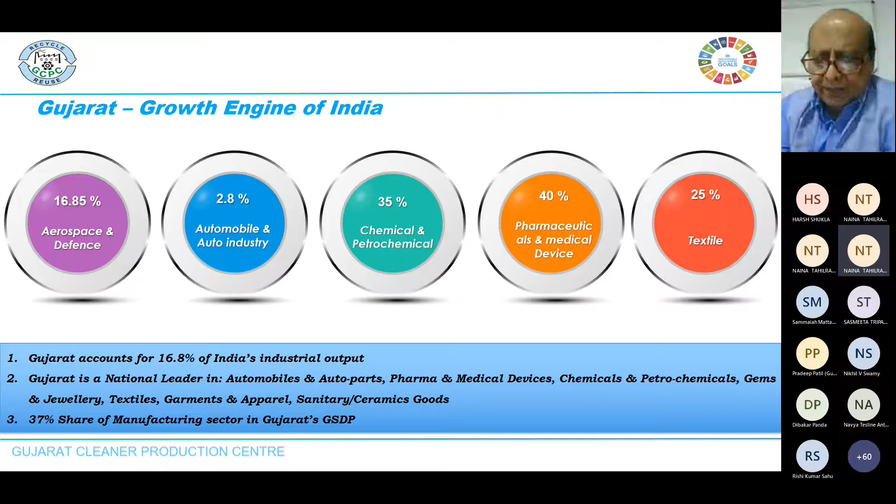As you know, I come from the industrial development department, and we need industries. We have been developing industries. And if you talk of the growth of Gujarat, we are now leading in aerospace and defense, then automobile. But the important sectors for us are chemical, petrochemical, pharma, and textile. So that is almost, put together, almost 50% of these national products being manufactured in Gujarat.

And if you look across the geographical area of Gujarat, we have spread all over, covering all areas of Gujarat, having different sectors like engineering, chemical, textile, mineral based, agro, plastic, paper, and others. So this is the scenario.

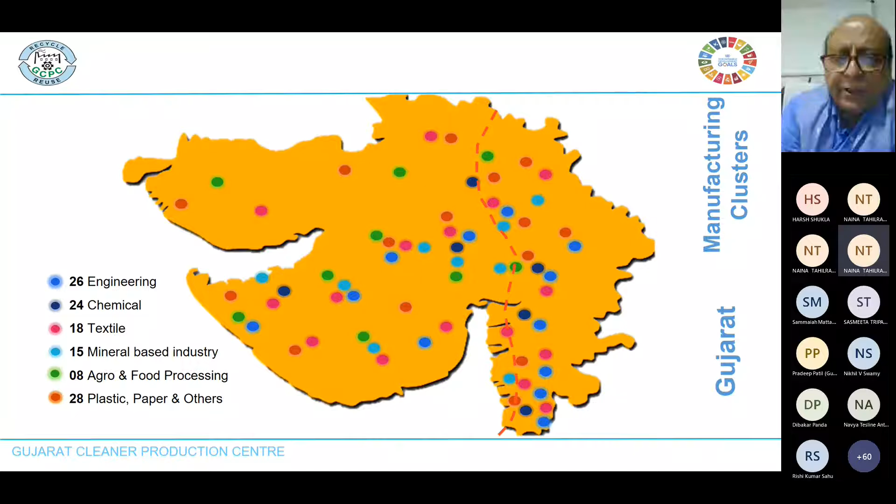And for the smooth development of industries, GIDC, that is Gujarat Industrial Development Corporation, was established in the year 1962 for the smooth development of industries. The very purpose of GIDC is to acquire suitable land for industrial development, then provide needed infrastructure like roads, water supply, electricity, even underground drainage, treatment facilities, and invite industries to come.

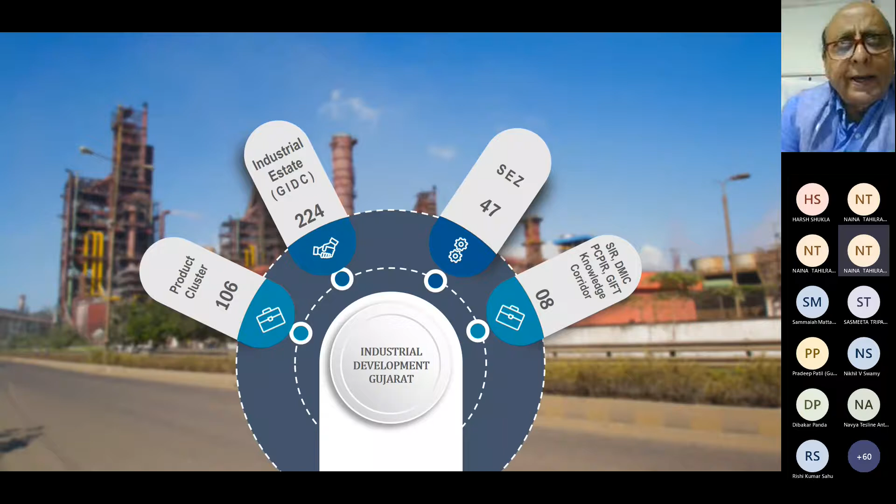And so far, as on date, we have got more than 220 industrial estates across Gujarat. Then we also have 100 plus product clusters. We talk of special economic zones and also special investment regions.

As you know, friends, there is the Delhi Mumbai Industrial Corridor, we call it DMIC, and the high impact industrial area within 150 kilometers on both sides of this dedicated freight corridor has an investment potential of almost $90 billion. And if you look at the length of that DMIC, it's almost 1500 kilometers, out of which almost 560 kilometers passes through Gujarat.

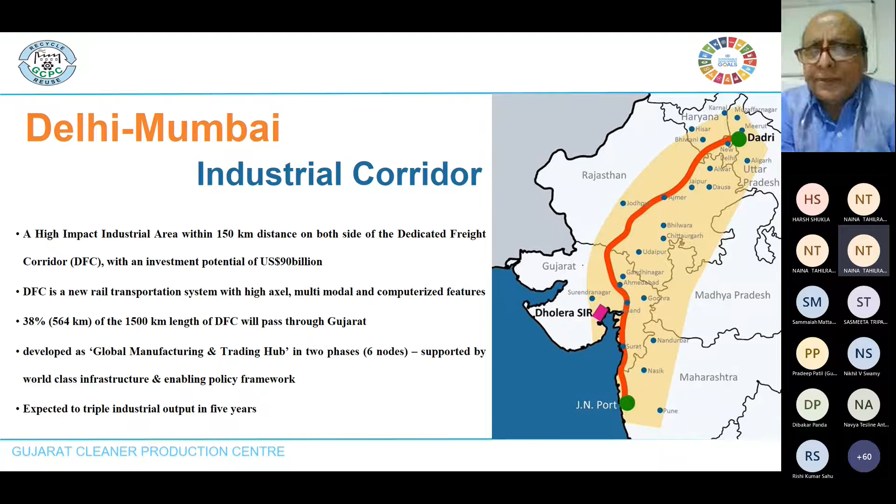And we are developing a very important special investment region across both sides of this DMIC. The most important is Dholera Special Investment Region, which we are developing in 900 plus square kilometers, having all facilities like innovation center, industries, logistics, knowledge, IT related industries, commercial, residential, entertainment, all that.

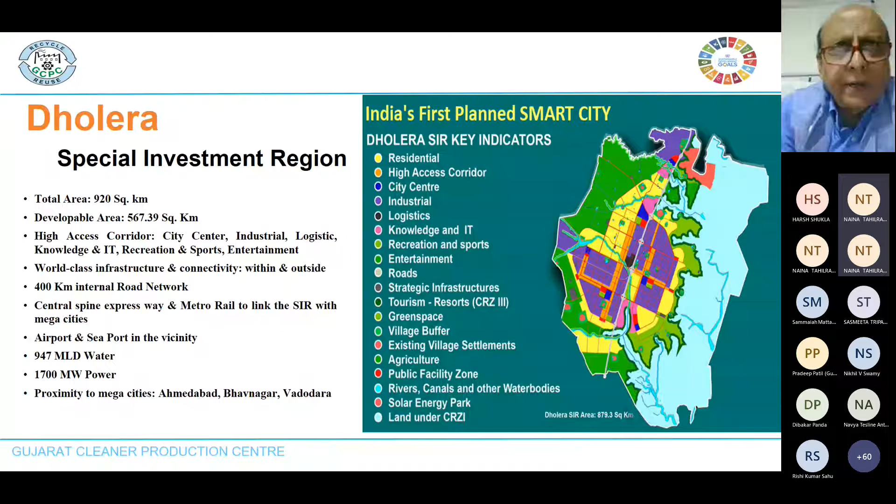So that is what we will be putting with the provision of 900 plus MLD water supply, and also the latest sewage treatment plant, so that we can recycle each drop of treated wastewater, and also a common effluent treatment plant for treatment and recycling or reuse.

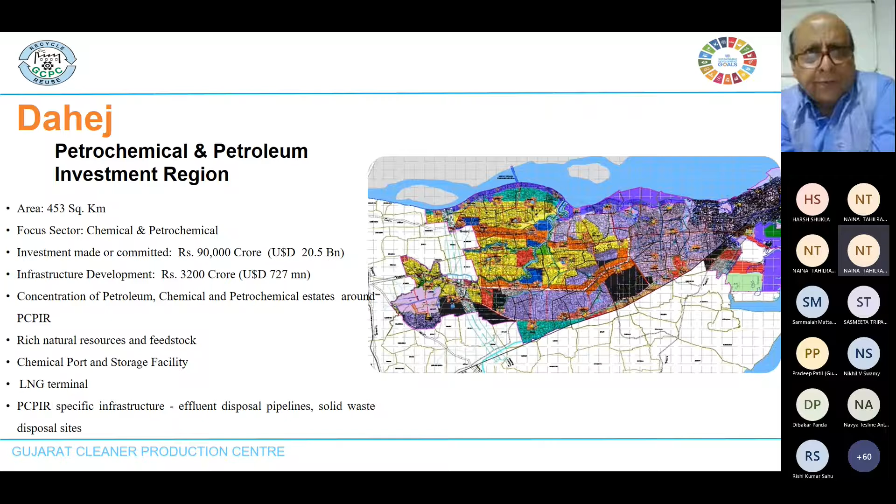Another important one, friends, is very near to our Bharuch Engineering College, around 50 kilometers from Bharuch - that is Dahej. We have a petrochemical and petroleum investment region, which we are developing in 450 square kilometers. The main focus sectors are chemical and petrochemical. Phase 1, 2, 3 are already being developed, and we are talking of further development. We have provided all needed infrastructure, including underground effluent pipeline, common effluent treatment facilities, and also disposal facilities for treated wastewater.

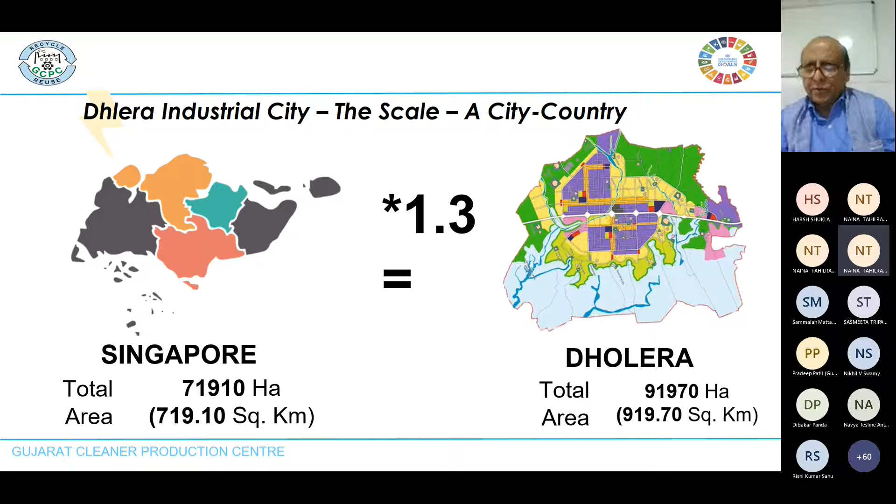This is just to give you an idea of how big Dholera would be. You know that Singapore has around 700 square kilometers of area, and we are developing 900 square kilometers in Dholera. What I'm trying to tell you is Dholera will be 1.3 times the size of Singapore itself. So you can imagine the type of development we have undertaken.

Back to our main thing, that is waste. So that is what we are considering. What is waste? And friends, you know that in cleaner production there is no waste.

It basically has certain resources, but we do not know the value of it. So that is very important. Whenever we talk of waste, it is not waste, but some resources which are misplaced. We do not know the value of it. Why is it arising? It is arising out of inefficient use of utilities.

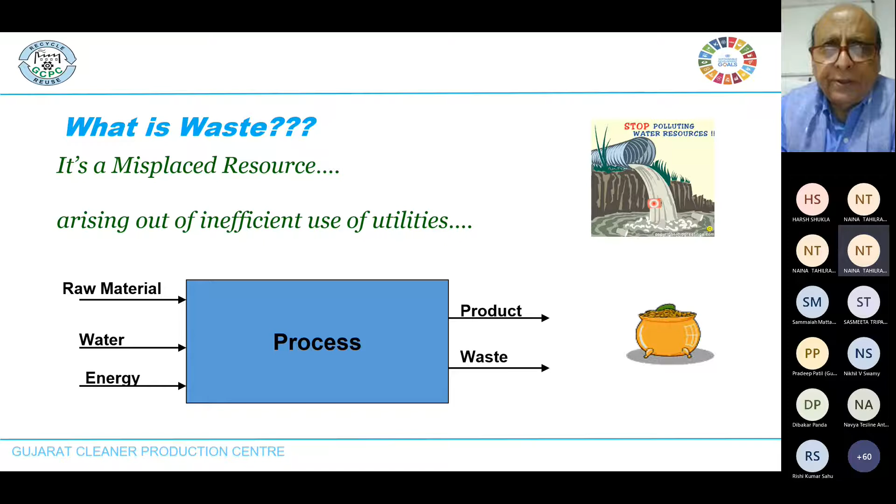Whatever process we have undertaken, whatever mole to mole reaction we talk of, the stoichiometry, or the role of catalyst and utilities, somewhere there is something which is not efficient, and therefore what we are getting along with the product is what we call waste, which could be byproduct, unreacted mass, or raw material, which has some resources. So in cleaner production, the basic definition of waste is that it is a misplaced resource.

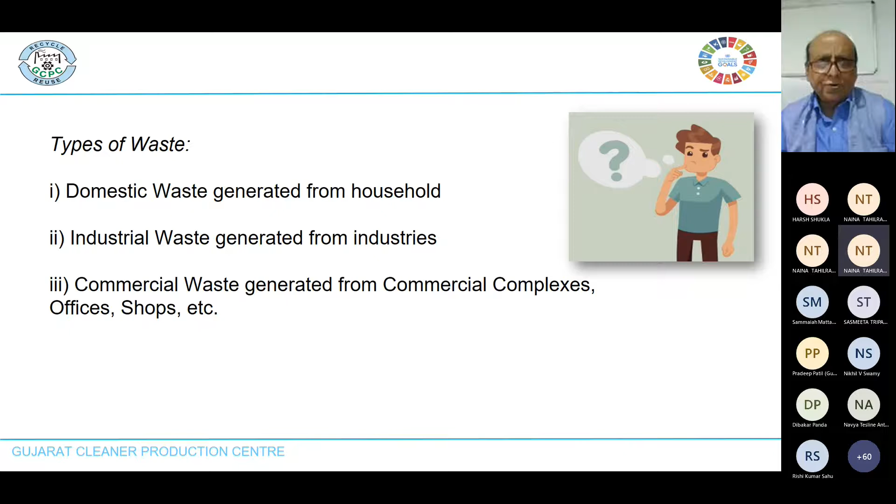Again, if we talk of different waste, it could be domestic waste which we generate from our household, industrial waste which is generated from industries, and another commercial waste which is from commercial complexes, offices, shops, shopping malls, theaters, and all that. So this is broadly how we are classifying it.

Domestic waste comprises garbage and rubbish which we throw in our dustbin, which could be bottles, cans, clothing, compost, or some food packaging, food scraps, newspaper, and whatnot.

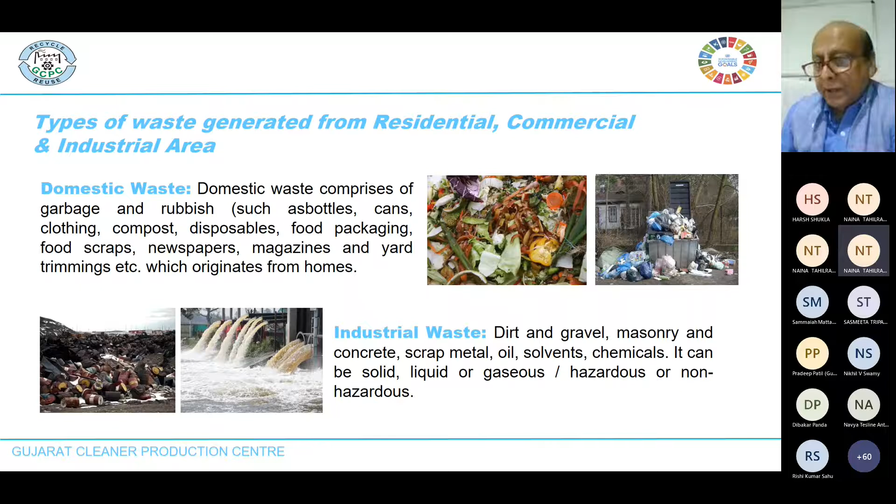So far as industrial waste is concerned, along with dirt and gravel, this is solid waste I'm talking about. We have building waste, masonry, concrete, scrap metals, oil, solvents, then going back to liquid, chemical, solid, liquid, and all hazardous waste which is from industries, and again back to commercial waste.

It is from different commercial complexes, offices, shops, restaurants, and all that, which could be biomedical waste if it is hospital waste, which is of course hazardous, along with some electrical waste or construction and demolition waste, and other food waste and everything. So that is what it is, by and large.

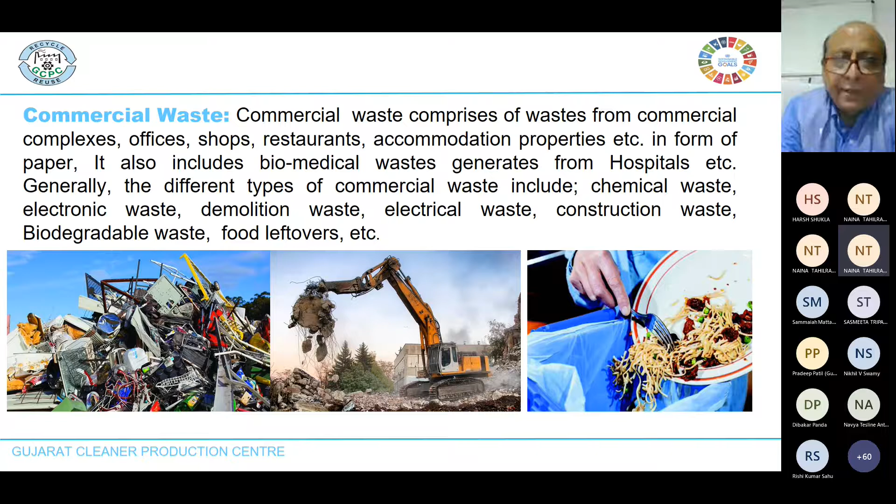So again, if we go for detailed classification, residential waste could be electronic, food, plastic, stationery, furniture. Commercial again, same thing - electronic, food, plastic. But then we have also got stationery waste, which is too much from our offices.

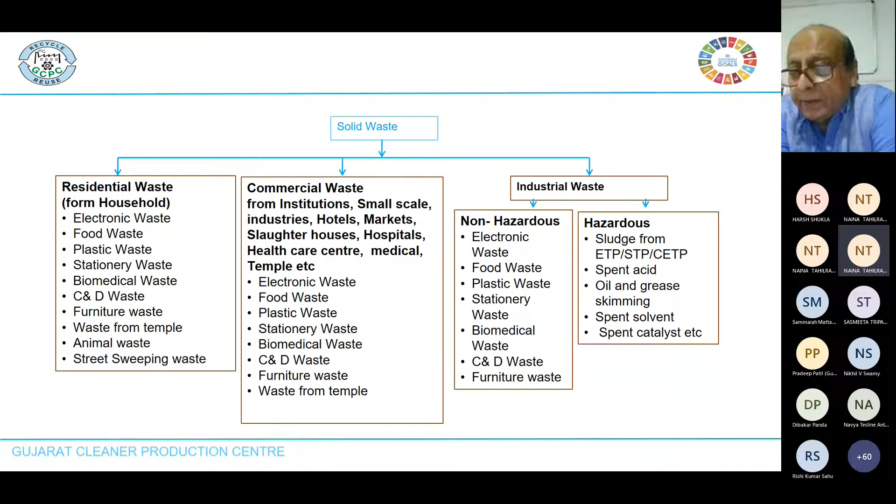And for industries, again we can classify non-hazardous and hazardous. The non-hazardous could be food, plastic, because we are now recycling it. Biomedical waste is, of course, hazardous, but now we have got facilities for it. But so far, hazardous waste from industries which we are dealing with concerns the sludge from effluent treatment plant or common effluent treatment plant. It could be spent acid, oil, grease, and solvents and catalyst and all that. So broadly, these are the classifications.

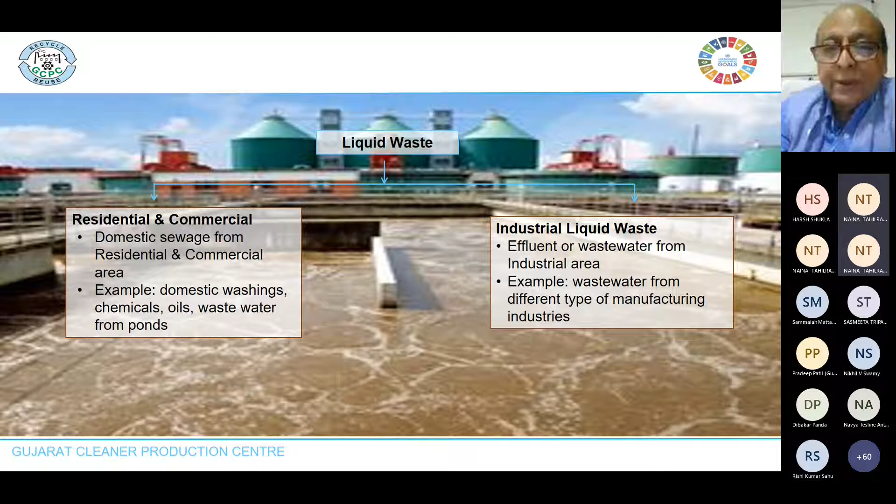Again, so far as liquid waste is concerned, talking of domestic waste, it is the wastewater from your toilets, what we call black water and grey water. And so far as industries are concerned, it is effluent from different reactors, from different units, which could be inorganic, organic, oil, water. But the main thing we are focusing on is hazardous waste, which is of course sludge from ETP, and again the same thing - spent acid, solvent, catalyst.

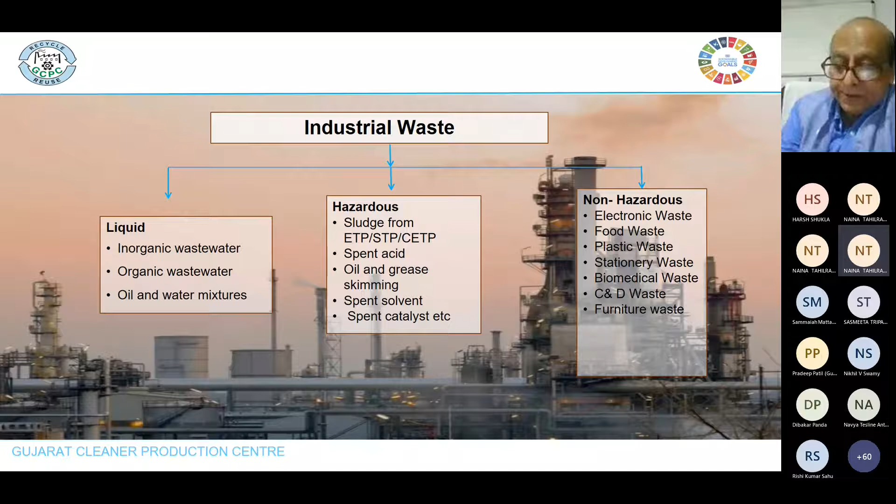And then we also have electronic, food, plastic, stationery, and biomedical waste. So these are broadly the classification of waste.

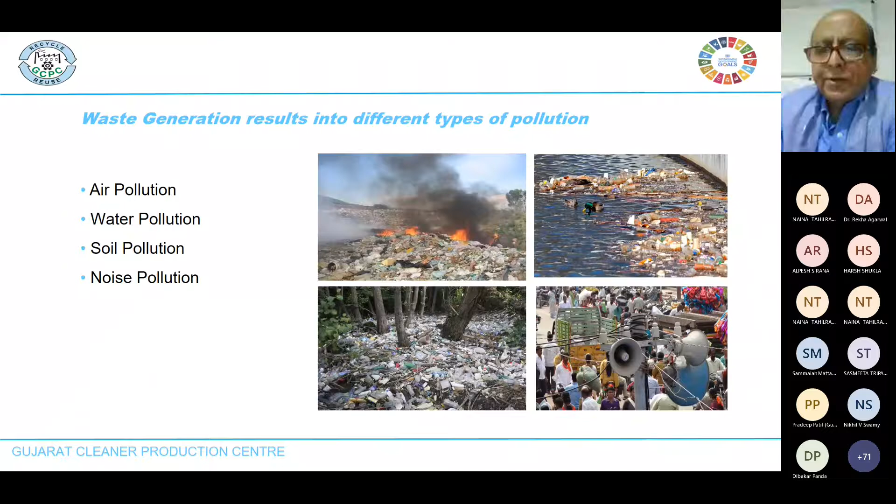Okay, so why should we be concerned about waste management? Because, as you know, improper management of waste creates issues of pollution problems - it could be air, water, soil, noise, and all that, which are creating very indecent conditions.

And taking this into account, it is good that there was a historical judgment - Special Civil Application 770 in the year 1995 - where the Honorable High Court ruled that industries located in and around Ahmedabad are generating waste which could be hazardous.

Because of this hazardous waste, there are issues of pollution. And because of pollution, there are issues of health and also affecting our crops. So, to be very honest and frankly, before that we were not aware.

Though there was a Water Act 1974, and Environment Protection Act 1986, we being an Industrial Development Agency never took it very seriously until this historical judgment was given in the year 1995. Then we realized that our industries, particularly the chemical industries, are generating something which is hazardous, and that is causing problems.

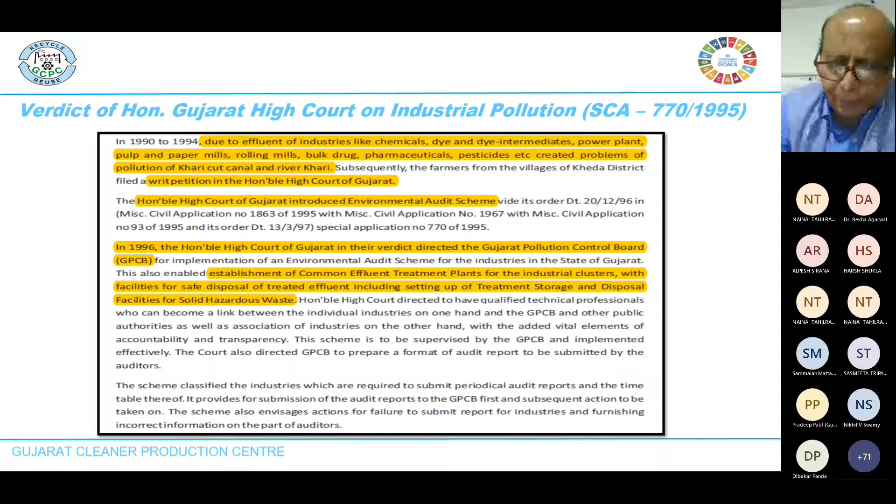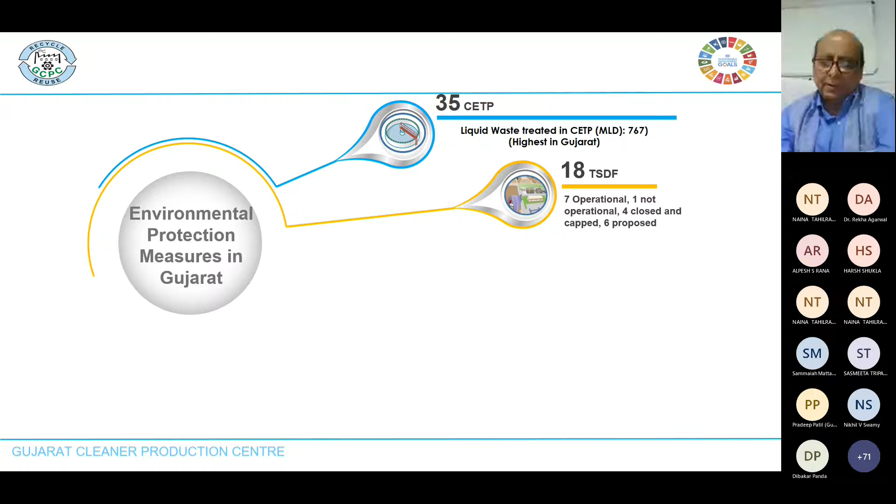That was the starting point, I believe, when we took it very seriously and started thinking about environmental protection measures through waste management. So initially, as you know, we went for the end-of-pipe concept, that is, you generate waste, take it to one point, and then treat it.

So the first idea for waste management through treatment came after 1995, 96, 97. We started thinking about the first common effluent treatment plant, because in industrial areas we mainly have small and medium entrepreneurs. For them, technically it was not feasible to have their own ETP, and financial viability was also not there. So the concept of common effluent treatment plant emerged after the 1995 judgment.

The first common effluent treatment plant was commissioned in the year 1997 at Vapi, with 55 MLD capacity. And it's good that we carried forward from there, and as of today we have common effluent treatment plant facilities at around 35 different industrial clusters.

We have created almost more than 750 MLD treatment capacity, and that, friends, is the highest capacity treatment facility which we have created. Not a single state in our country has so far reached this much, 750 MLD treatment capacity through common effluent treatment plants. At the same time, when we deal with liquid waste management through treatment facilities, we are also generating hazardous sludge, that is solid waste.

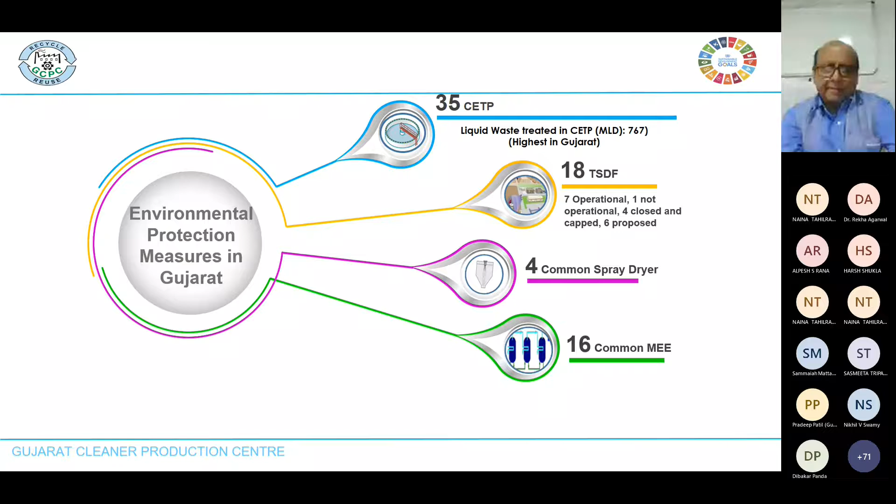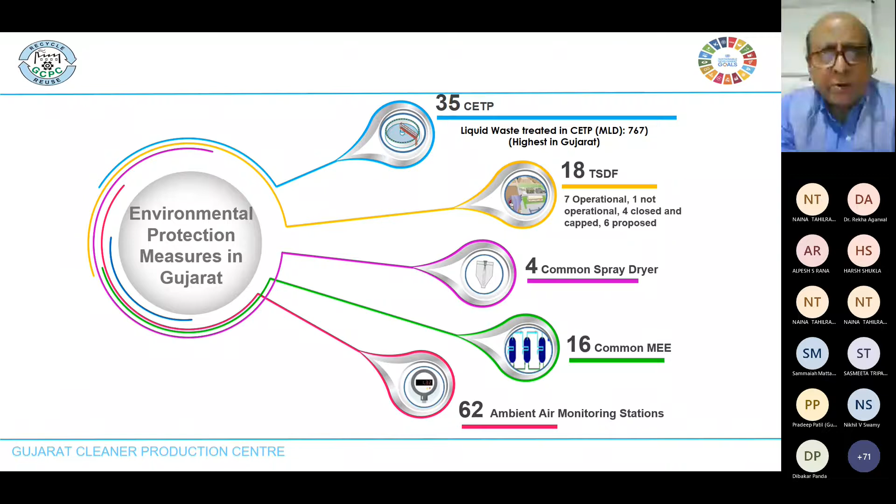Beyond that, we have also provided common spray dryers and common multi-effect evaporators at 16 places. We are conducting ambient air monitoring as part of waste management, and the wastewater after treatment is being disposed of at a safe disposal point.

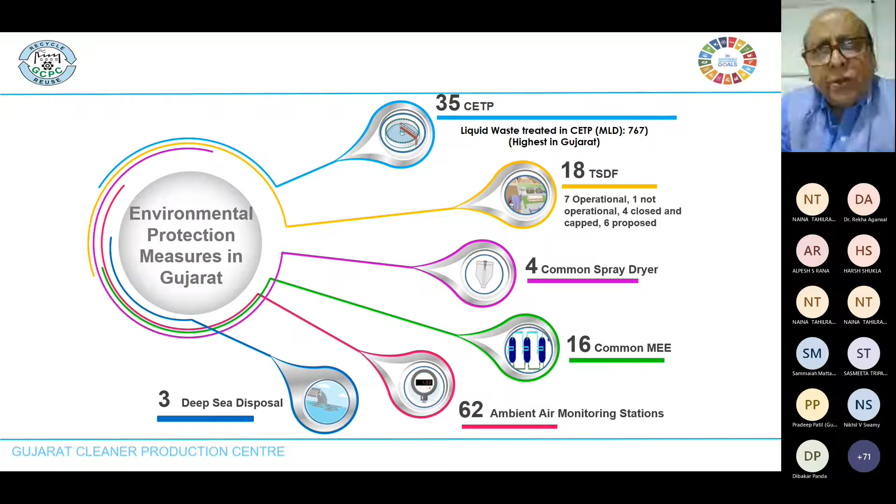For that, we have executed very expensive sea disposal pipelines in case of Ankleshwar, Panoli, Jhagadia, and Dahej, where we have provided deep sea discharge. So that is what I wanted to tell you about the waste management so far, the end-of-pipe concept which we have implemented, and we are running it successfully in Gujarat.

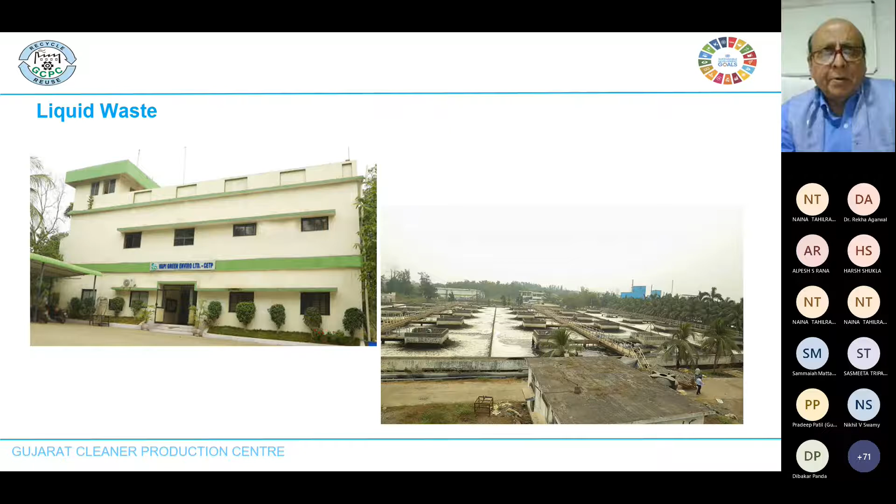These are some photographs of common effluent treatment plants, and every common effluent treatment plant has a very good environment laboratory where we can run different processes.

Initially we go for lime dosing because mainly we receive acidic effluent, and then we segregate right from the first point through highly concentrated streams. We take that to a common multi-effect evaporator and common MVR, then it is condensed, then to a spray dryer, and then we get this powder or salt, which is sent to the disposal facility.

On the other hand, the less concentrated effluent we take to the conventional treatment plant through screening, followed by grit chambers, equalization tank, flash mixer, primary clarifier, aeration tank, secondary clarifier, and final clarifier. Then we take sludge from the primary and secondary clarifiers to the sludge thickener, then decanter, and then to the sludge disposal site. So this is the conventional process.

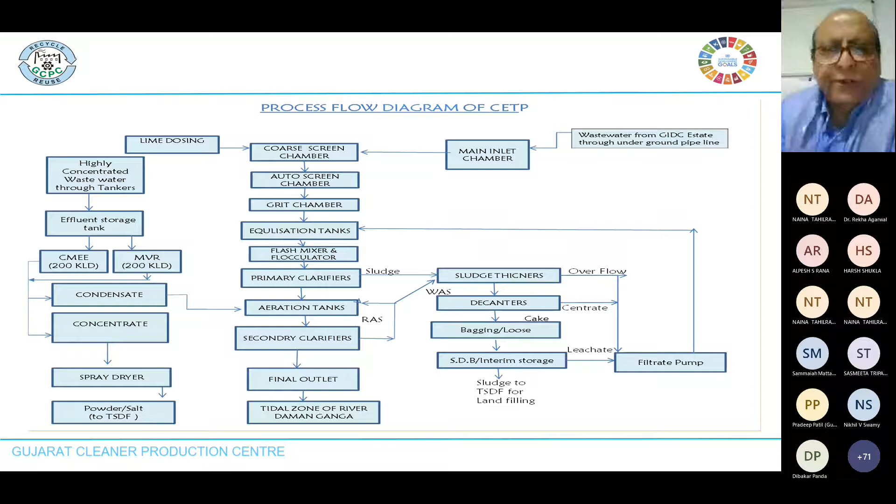And after treatment, for example at our Ankleshwar, Panoli, and Jhagadia sites, we have provided one common effluent treatment plant.

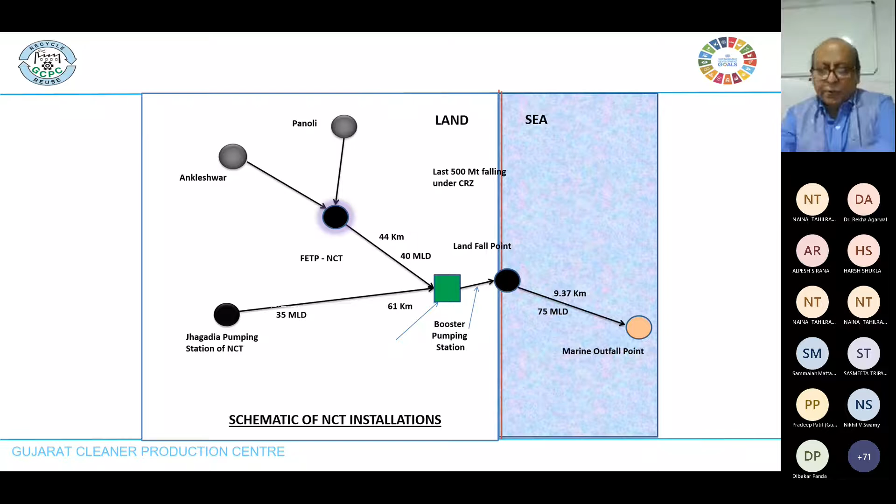We are receiving the partially treated waste from Panoli, Ankleshwar, Jhagadia at one point. We have a common effluent treatment plant facility of 40 MLD, which we are augmenting to 75. And again, we are disposing of that treated wastewater into the deep sea, almost a 10-kilometer pipeline into the sea. That facility we already created of 75 MLD, so you can imagine the type of work which we have put in. This is what in nutshell we are collecting and taking the disposal pipeline into the deep sea, and that is at Dahej, which is close to you, which we are under commissioning.

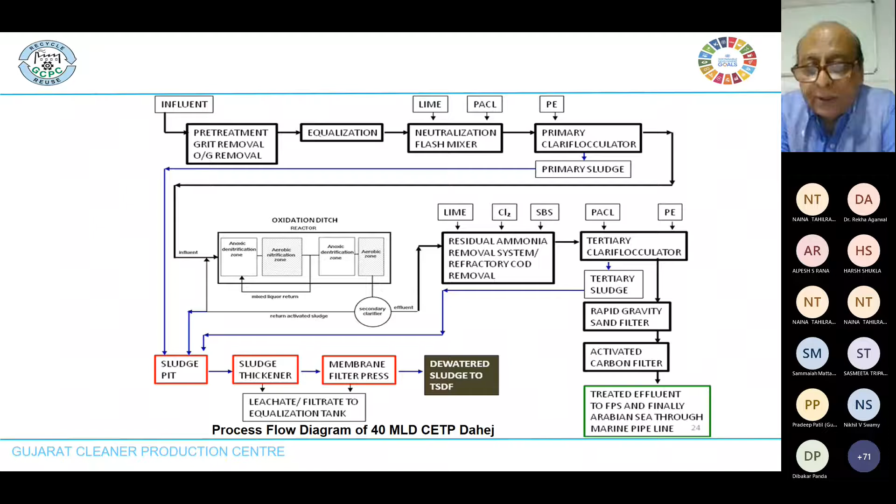Again, the same thing, same conventional process, where we have equalization grit, followed before that by neutralization, clarifier, and then we have secondary treatment plant. We have provided an oxidation ditch, and then from there we are taking it further because we are facing some ammonia issue, so removal of that system also we have provided, followed by the tertiary clarifier. We add polyelectrolyte, sludge is also being taken to thickener and filter press, and then after dewatering it is being sent to the TSDF.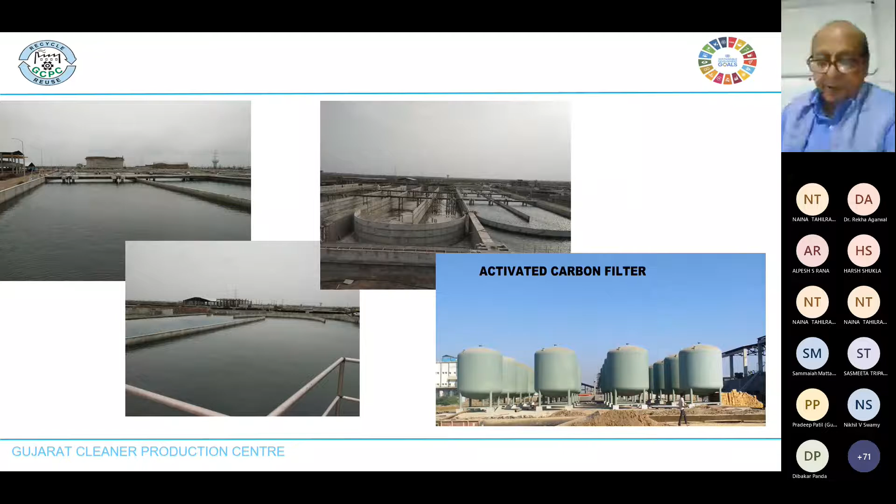This is what, some photographs of our Dahej CETP, which is already commissioned and running at 40 MLD.

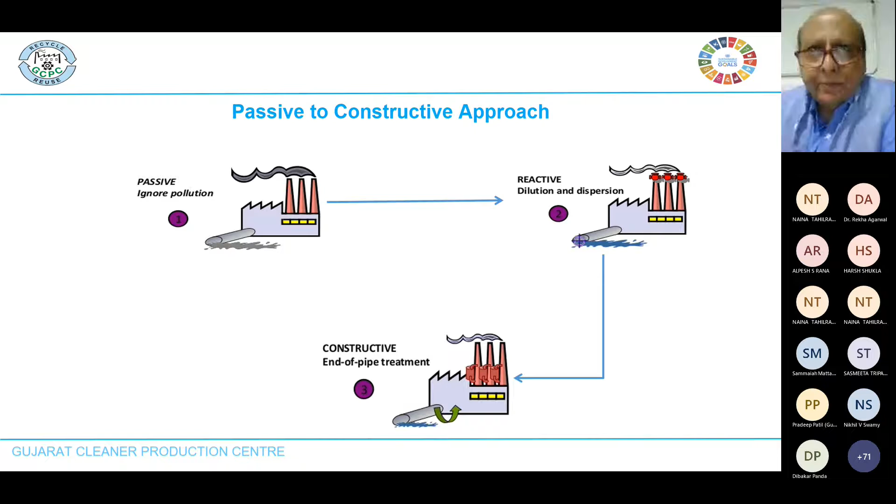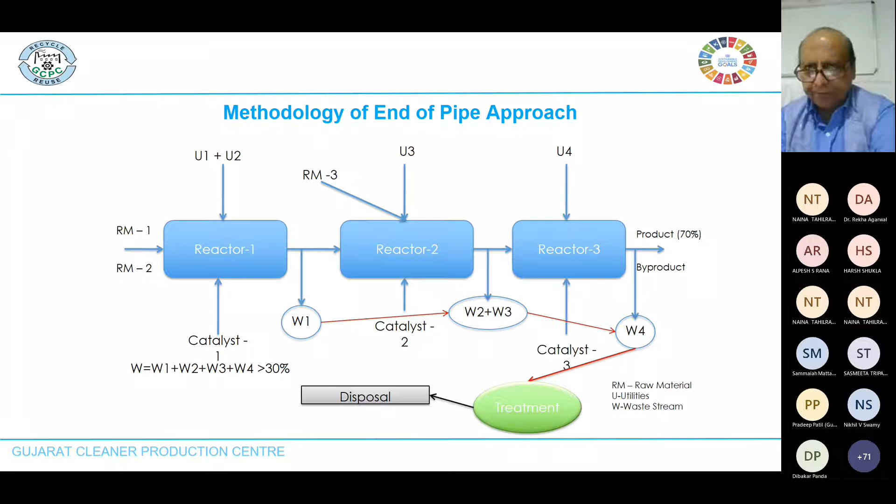So what I've been discussing about the overall waste management concept - earlier there was no management, just ignoring. Unfortunately, our parameters of pollution are concentration based, that is mg per liter, so dilution and dispersion was there. And then what I have discussed is the constructive approach, and that is end of pipe. So far we have provided so many facilities - this was the approach. The waste is being collected from different reactors, taken to one point, treated, and disposed. So that is the first concept of waste management, providing treatment facilities.

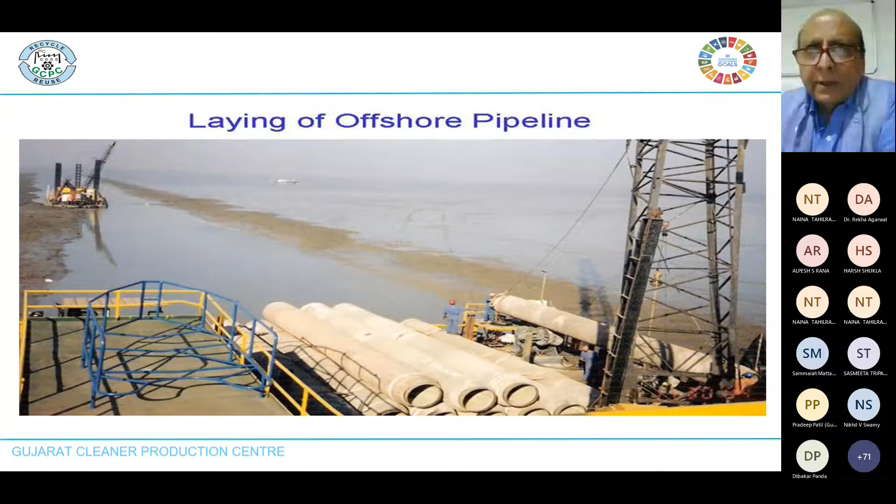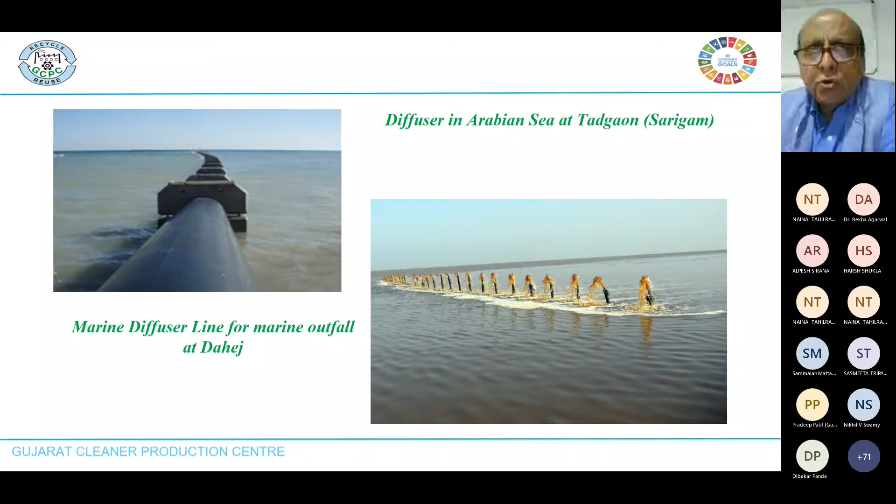And again, these are some pipelines which we have laid into the deep sea, marine diffuser arrangement. You can see the diffuser we have provided at Dahej, almost 4 kilometers into the deep sea, to achieve 150 times dilution.

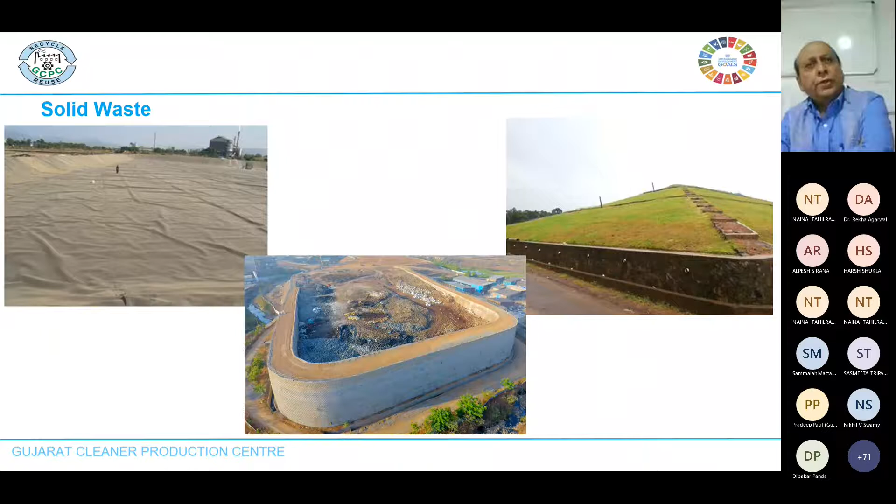These are very costly. If you talk of cost, the capital cost itself is more than 200 crores. And to run all these facilities of common effluent treatment plant, in most of the cases we are spending 1.5 to 2 crores. So you can see the type of money which we are spending.

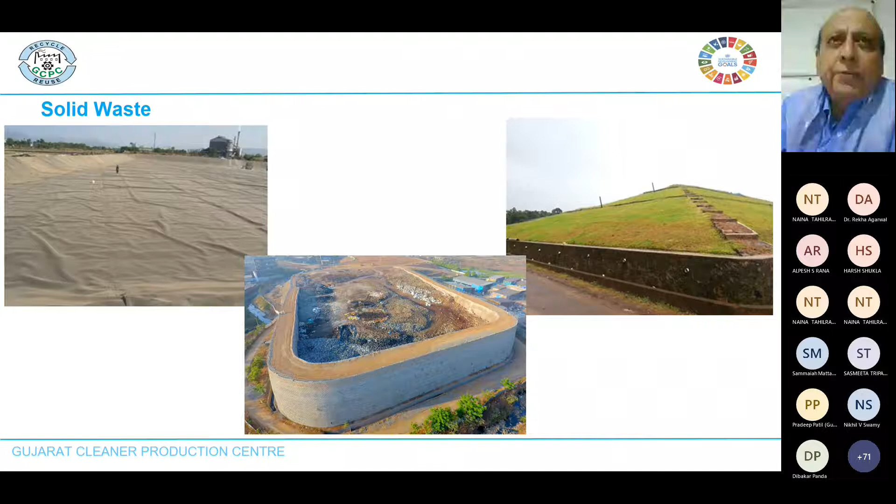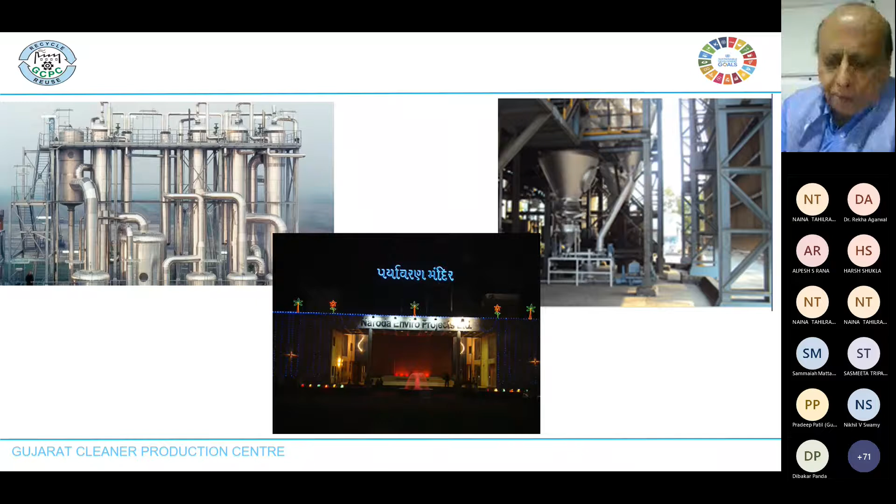So this was the concept. Earlier, economy and ecology were going in opposite directions, not reaching any point. Through end of pipe, what we have provided is a very sensitive balance, what we call a seesaw - economy on one side, ecology on the other. So if we lean more towards ecology, in terms of parameters and all that, then our economy is hampered. And if I talk of too much economy through industries, our ecology is hampered. So this is also not sustainable development.

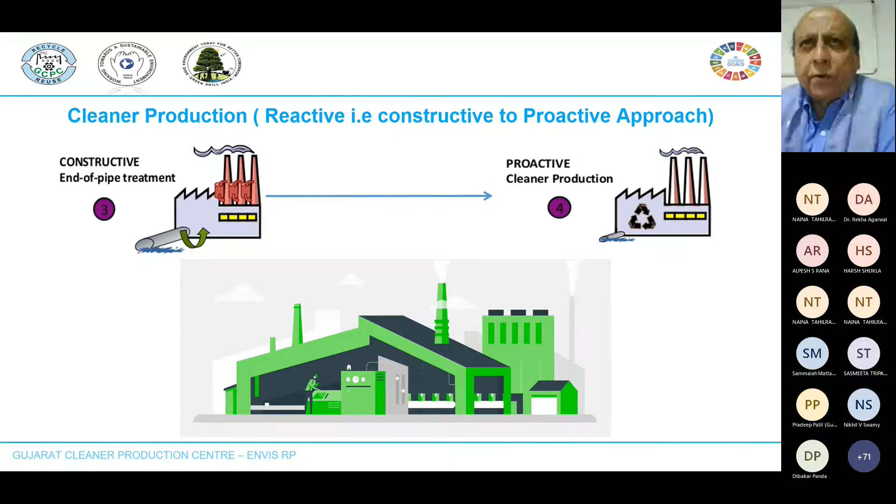But the tool which we are promoting is common effluent treatment plants - I mean this cleaner production, where we take economy and ecology together. Whenever there is an industry, we also first tell them how best they can reduce their waste right at the source itself. So this is the most sustainable concept, where economy and ecology work together, and that is what I call a proactive approach towards environmental management - cleaner production, moving from reactive to proactive. So right from the designing of your industries, you must think about the sources where you will be generating waste, and then think first how best you can reduce it. If not everything, then think of recycle, reuse, or recover. So these 3, 4, or 5 R's are very important: reduce, reuse, recycle, recover.

With this concept, long back in the year 1998, UNIDO, that is the United Nations Industrial Development Organization, approached us and requested for this highly industrial sector, Gujarat being one, on how best we can apply this cleaner production concept. So these are our activities.

Our main activities are orientation and awareness programs, followed by training programs. We provide training to students and to industry. And the very important thing which we have been doing is the demonstration project.

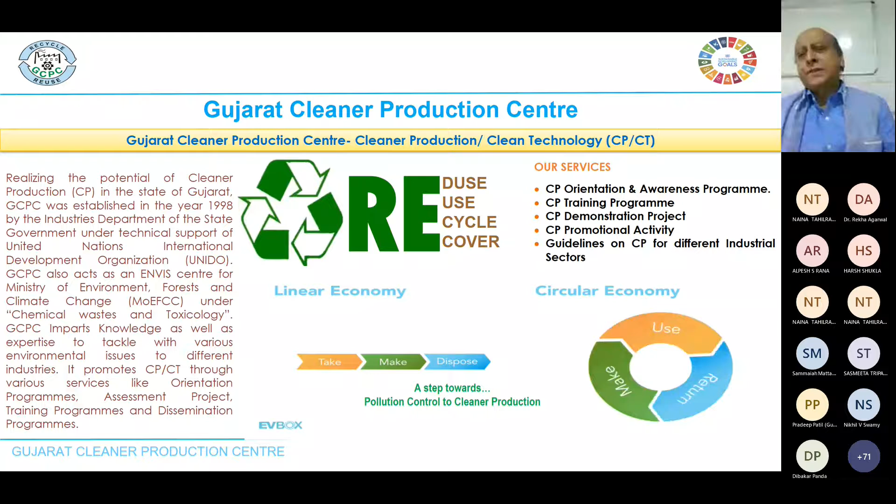We do what we call CP assessment in the willing industries, where we take up the task of generating cleaner production tools after studying their process. With a structured methodology, we derive a cleaner production assessment project which is implemented by the industries, and we also monitor the implementation.

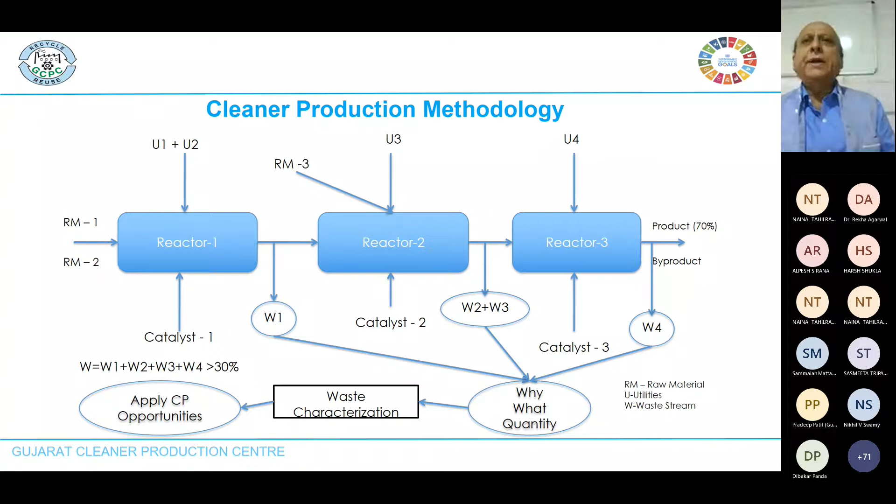The scenario change is that the waste stream, which earlier you were collecting and taking to one point, in cleaner production we now segregate. We look at the waste stream to see why it is there, when it is there, what it is, what it contains, the volume, the parameters, the characteristics. Then after that characterization, we apply our CP opportunities where we can minimize their waste.

In earlier end-of-pipe management, we simply collect and treat. Here, instead of collecting, we just study why it is there, when it is there, what it is.

UNIDO has a well-defined six-step methodology which we got started. The very first step is to have a CP team - qualified chemical engineers, environment engineers from our side, along with the industry side: the production manager, the process in-charge, and the people. Then we go for listing out the process steps, different steps with the flow diagram.

Once you do that, then we study where you are generating waste, and for that particular reactor we go for the material and energy balance, and assign cost to it and identify the causes.

After knowing the causes, we develop what we call CP opportunity. The best opportunity which is selected is again reviewed on how far it is technically feasible, financially viable, and of course environmental aspects - there should be improvement in environment.

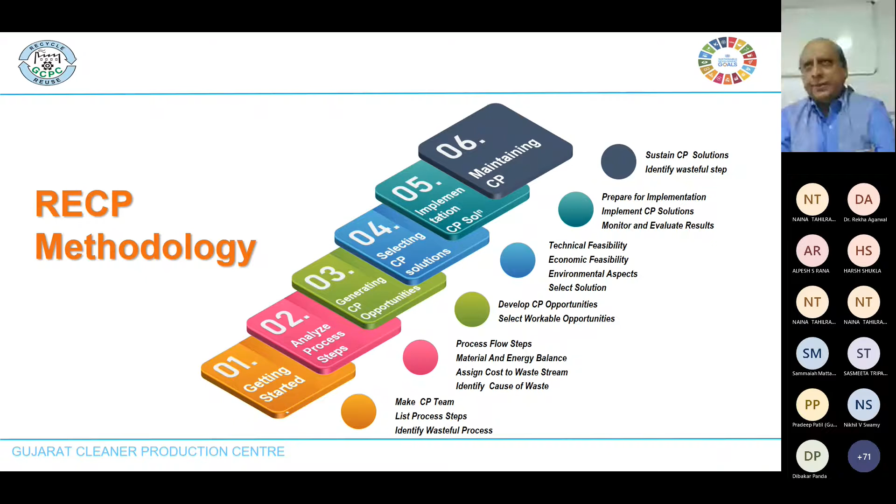Then we prepare detailed CP implementation schedules which are given to the industry for implementation. We also monitor time by time and guide the industry for implementation. So that is the well-defined methodology by UNIDO.

And these are very simple tools, also defined by UNIDO. The best is reduction at source itself - that is the best solution, done through good housekeeping, then through process changes, which could be raw material changes, equipment modification, better process control, or you can go for green chemistry, clean technology.

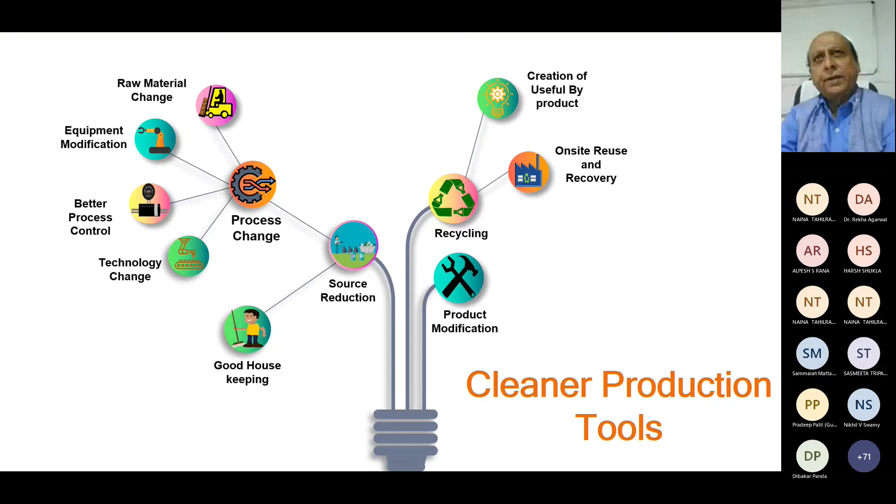On the other side, we explore possibilities of recycling, which could be on-site reuse and recovery, or the possibility of creation of some byproduct. We also discuss product modification - can we go for a non-hazardous product. We have generated a number of success stories of our cleaner production implementation.

So far as our Gujarat work is concerned, given the time limit, I can discuss something. This is very important - there is a case of waste value recovery from waste. It is a case study of an industry manufacturing 2-naphthol monosulfonic acid. The effluent was partially concentrated after selective neutralization, and crystallization yielded a mixture of two valuable organic components which couldn't be separated - that was the task.

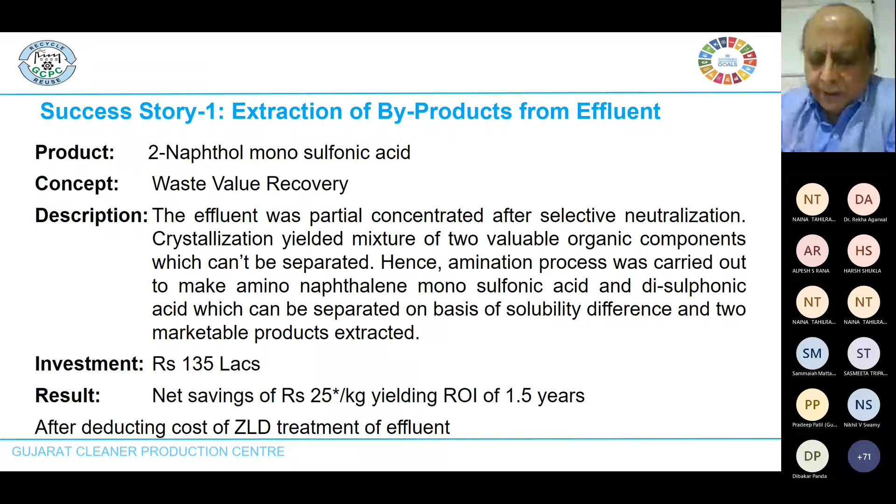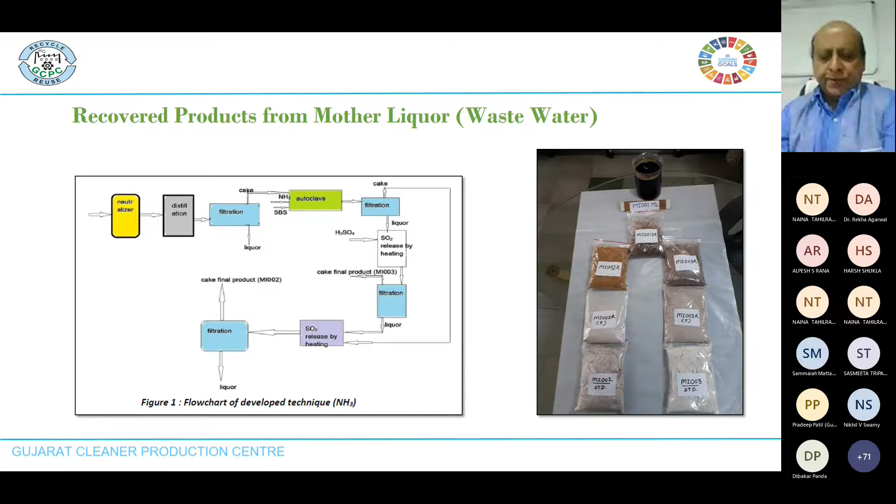So the amination process was carried out to make amino-naphthalene monosulfonic acid and disulfonic acid, which can be separated based on their solubility differences. Of course there was a good investment, but as we could recover the useful material, the return on investment was hardly 1.5 years. So that is what we got - byproduct recovery from the mother liquor based on their different solubility, which is again a sellable item for the industry.

So what earlier went as mother liquor and waste to ETP, now they could recover as valuable byproduct. Another example in Surat - as you know, our textile industries are generating chindi waste, small pieces of cloth which are discarded or thrown away. In this case, the concept was waste to energy.

Their effluent, which had high salt and could not be treated with conventional biological process, required ZLD - they had to evaporate using a multi-effect evaporator, for which they needed energy. The energy cost was very high because they were using natural gas.

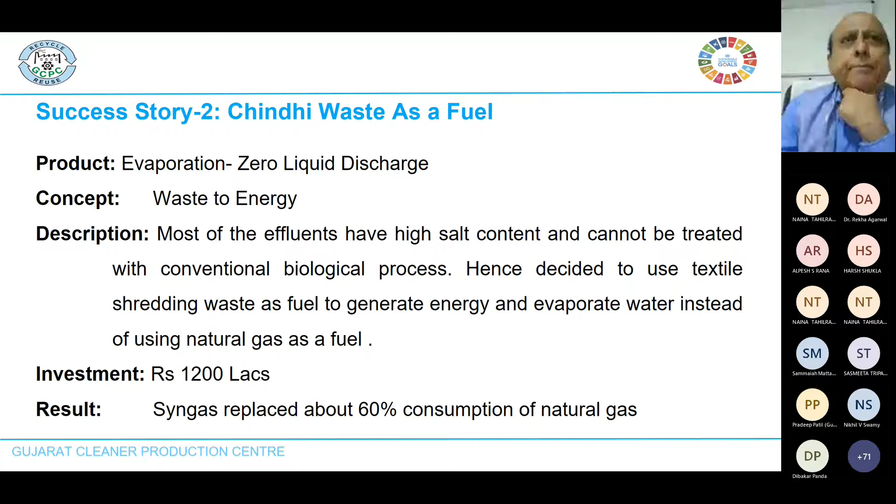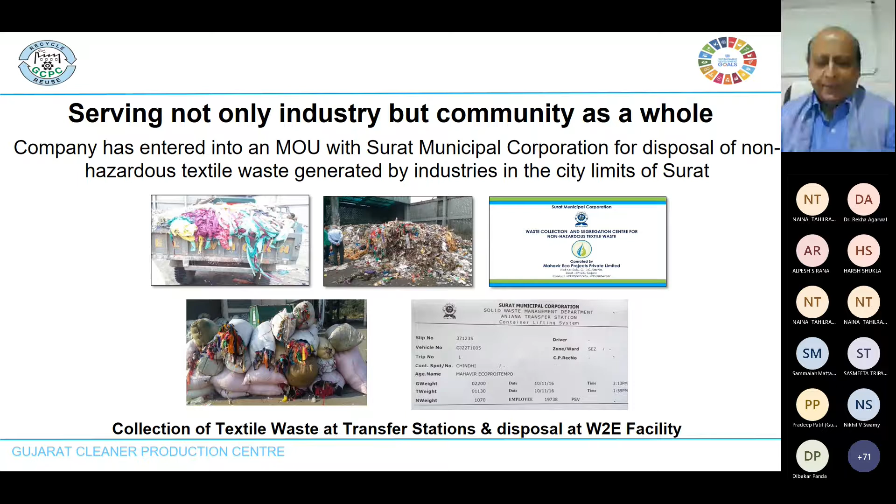Then they changed slightly to co-processing - that shredded chindi waste was processed into their fuel, which gave savings in natural gas. We could save more than 60% of natural gas with co-processing of this chindi waste, and the syngas generated was used for their multi-effect evaporator. There is another example of replacement of alkaline scouring with bioscouring enzyme for enzyme scouring.

Scouring is carried out to remove impurities present in cotton. They get gray cotton from Bhiwandi, which contains many impurities, so the very first step is scouring of the cloth to remove these impurities. This is done at high temperature, above 100 degrees centigrade, with sodium hydroxide, which produces strong alkaline effluents having a pH more than 12, requiring acid for neutralization, and also results in high organic loads.

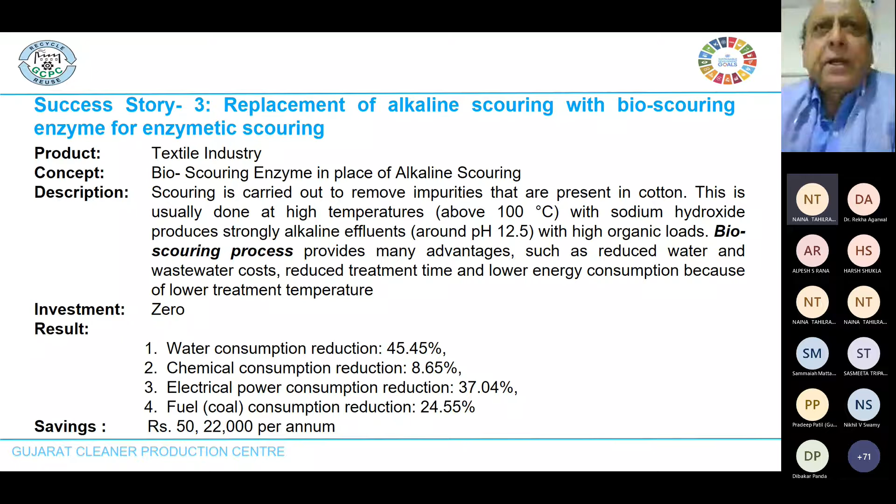This led to the concept of replacing alkaline scouring with bioscouring. Practically there was no investment required, and on the contrary, there was a saving of almost 50 lakhs per annum. This is how it is being implemented in a few industries of the Surat textile industry.

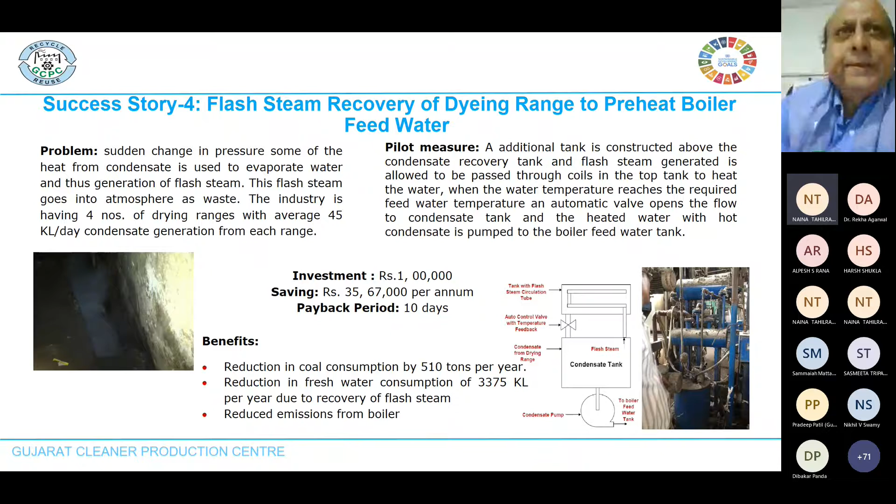Another example is the recovery of flash steam in the dyeing range to preheat the boiler. Earlier the flash steam was being wasted, but they diverted it to preheat the boiler feed water. There was an investment, but because the heat requirement went down due to the preheated water, the payback period was only 10 days. That is the attractive part of cleaner production here - whatever you invest, there is a calculated return on investment, the payback period.

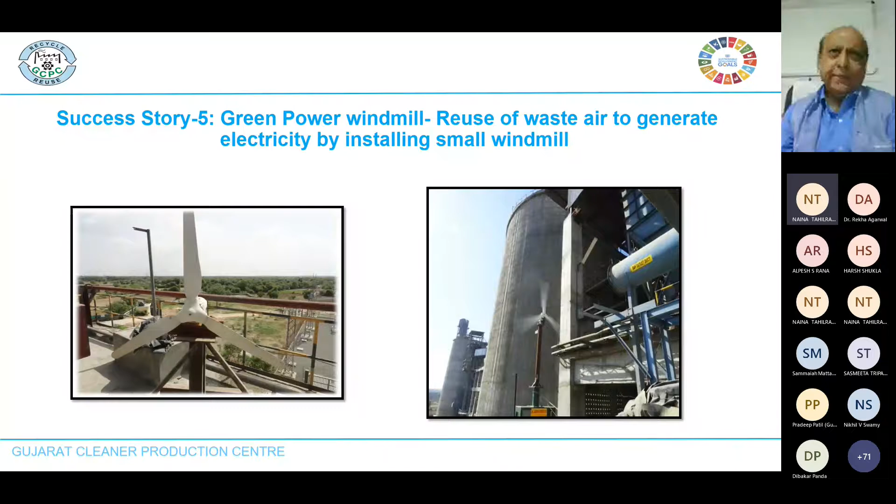Another example is a cement industry located near Mehsana, where they were getting excess air. They brought it to the roof and installed a small windmill, and through that windmill they are generating electricity. So earlier it was a waste, now they are generating electricity from it.

Another example is plastic waste. We have many paper recycling industries, mainly at Vapi, and we don't get enough waste paper locally, so many paper industries are importing waste paper from European countries.

Most of this imported waste paper is laminated with plastic, which was an issue because when recycling it for manufacturing cardboard and packaging material, they have to remove this plastic. For some time, the plastic was classified as hazardous, so they had to put it into landfill sites. Then it became non-hazardous, but there was no point using landfill space just for plastic.

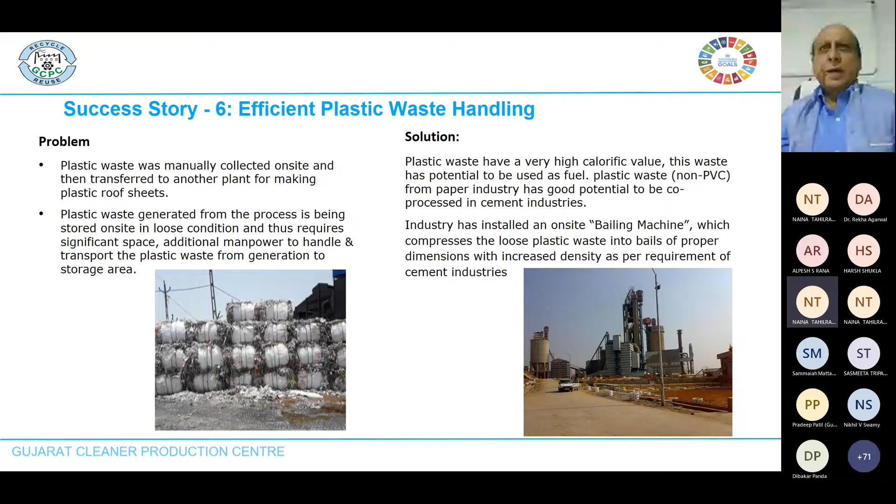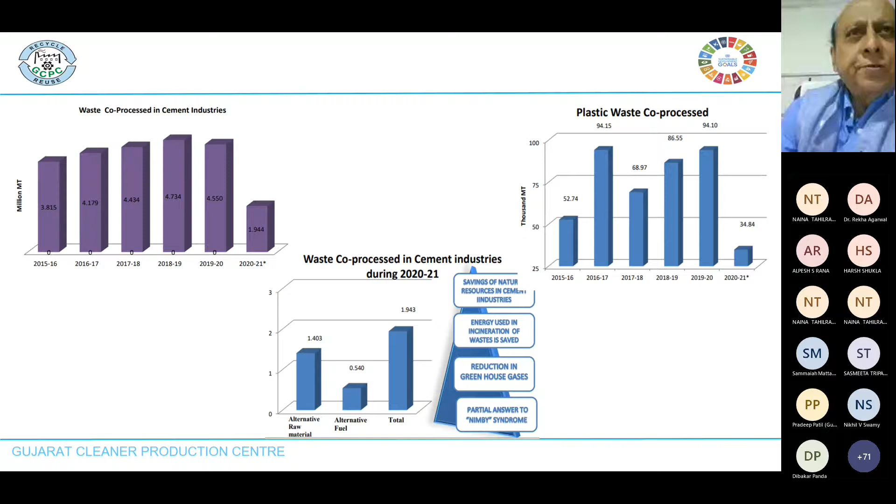This plastic had a very high calorific value, leading to the idea of reprocessing it in cement industry kilns. So they installed an on-site baling machine to bale the waste plastic, compressing the loose plastic, which is then sent to cement industries for co-processing. Earlier plastic co-processing was very limited, but now it is increasing and has become a common practice, with plastic sent to cement industries for use in the kiln as co-processing, since plastic has a high calorific value.

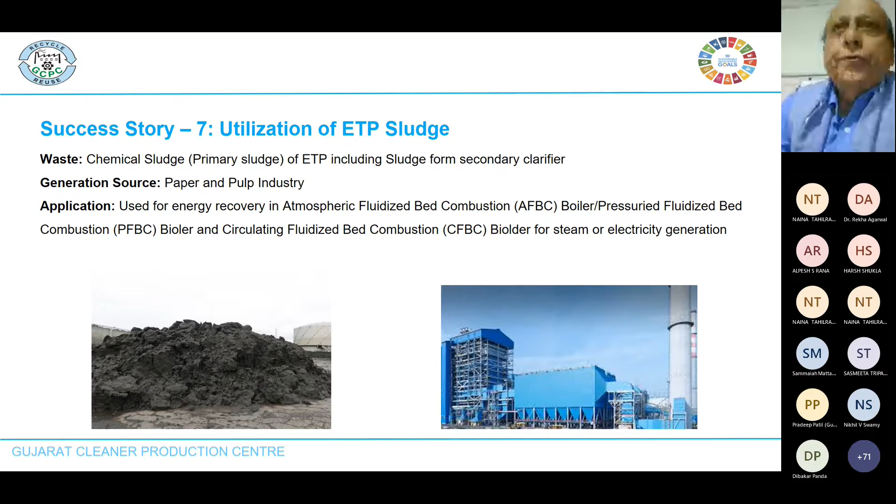Another example: we generate ETP sludge from our effluent treatment plants, both primary and secondary. For the particular waste from the paper and pulp industry, we realized there was a possibility of energy recovery using atmospheric fluid bed combustion, called AFBC. This was implemented, and we were able to generate steam, which is used for generating electricity.

These are some examples - we have documented a number of them - but these are examples of our implementation of cleaner production in waste management, which is proactive. It's good that Gujarat is being very proactive.

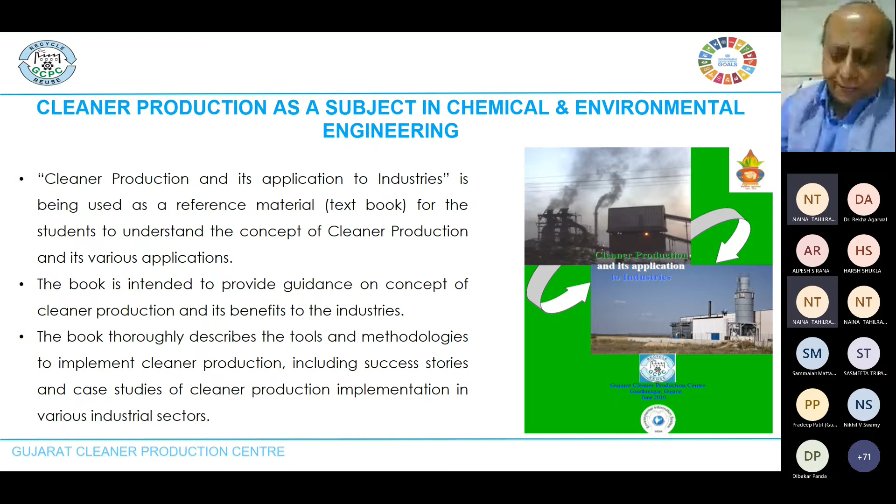The subject of cleaner production has also been introduced at the environmental engineering level in the seventh semester. It is being taught, and we have compiled a book on cleaner production which is being used as a reference. That is how we initiated the first step of using this book.

We also wanted to motivate more industries to come forward. The government thought that if industries are to do something new and innovative, they need some appreciation and motivation. So the Government of Gujarat instituted a CP award, given to industries that have set an exemplary example of implementing cleaner production. When Honorable Modi ji was here as CM, this award was started from the year 2005-6, and the first ceremony was conducted when he was CM here.

This is being followed up every year, where we invite applications from different industries about their cleaner production approach, and after a selection through jury, this award is given to the industry. Along with the award, a cash prize of 50,000 is given, but the industry has to give it to the person who generated those innovative ideas and CP options. This is how we motivate industry through the award.

Also, regarding other waste management, we have very recently taken up an awareness program on e-waste management. There are well-set e-waste management rules from 2016 and 2018, but awareness among the average person is still not there. We have more than 30 e-waste recyclers already registered in our country, but proper collection management of e-waste is not being done. We are trying to set up a proper e-waste collection system so that it goes to proper recyclers and you get real value for your electronics.